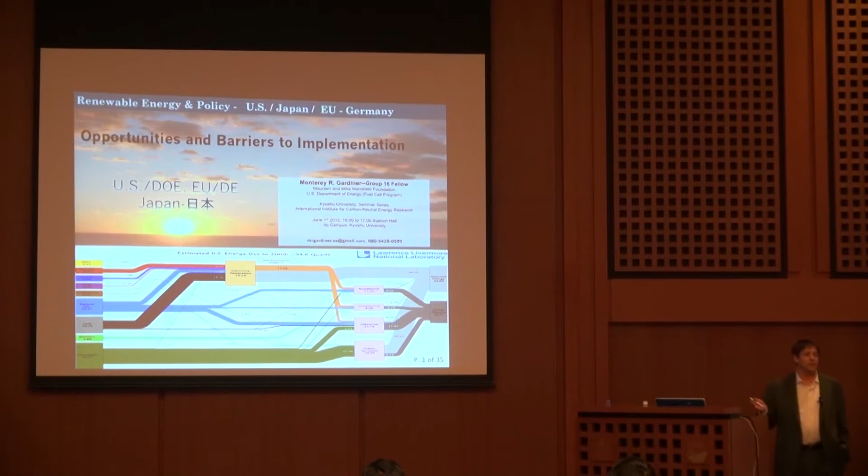During this talk, I want to talk a little bit about some of the opportunities and barriers to the implementation of renewable energy and energy policy in general. So can anybody here tell me one of the 3 E's of energy policy? Probably everybody here knows them, but who's adventurous enough to tell me one of them?

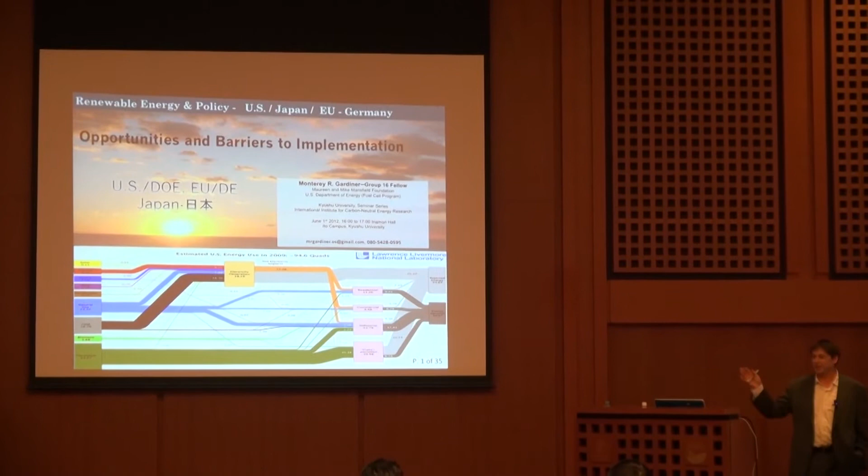I see somebody smiling with a green shirt, I think that means they want to answer. That's right, protection of the environment. That's one of the 3 E's that comes up quite a bit at NEDO and Keizai Sangyo Sho. Okay, how about somebody else?

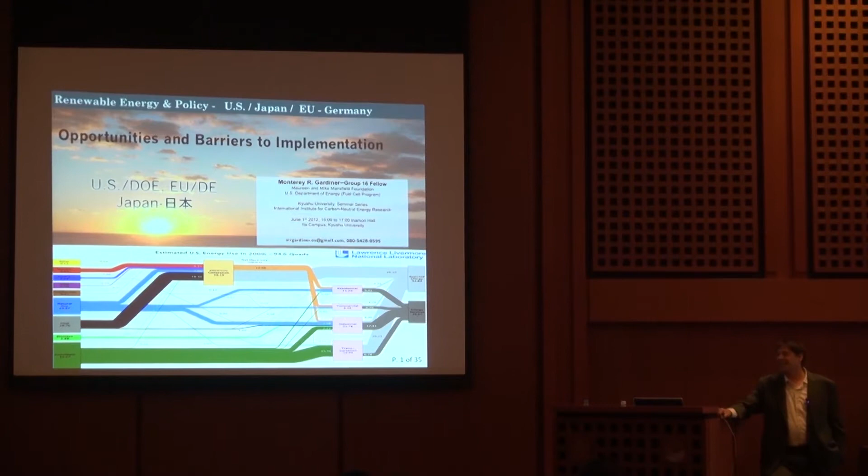Close, but we're trying to get the guy with the blue shirt to answer. All right, security of energy supply. That's one of them, and then we got one more. That's part of environment, but the last one I would think is the economy.

So how do you ensure that your economy stays strong? If you're paying too much for energy, your industry is at a competitive disadvantage compared to other countries. But I think an example of this might disprove, or prove, that the 3 E's are somewhat interrelated.

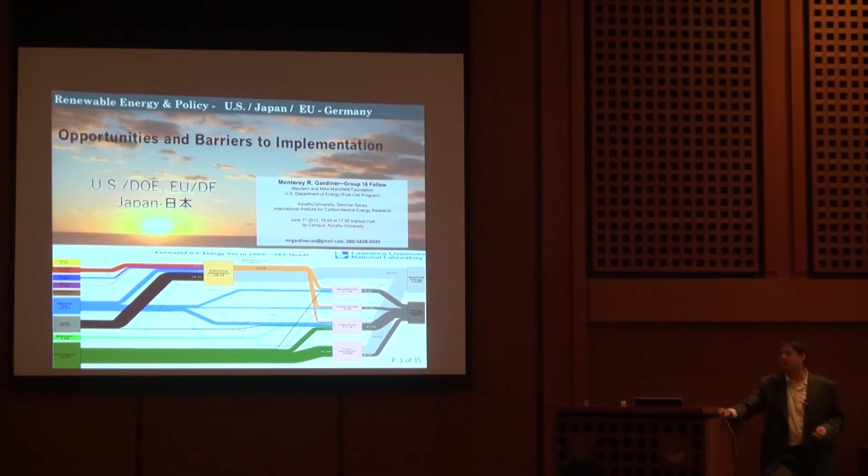Does anybody here know how much renewable energy Germany currently uses or consumes out of their entire energy or electricity supply? It's been in the newspaper, I think, probably fairly recently. Oh, there's somebody with a white shirt, they raised their hand. Minyo. Hi.

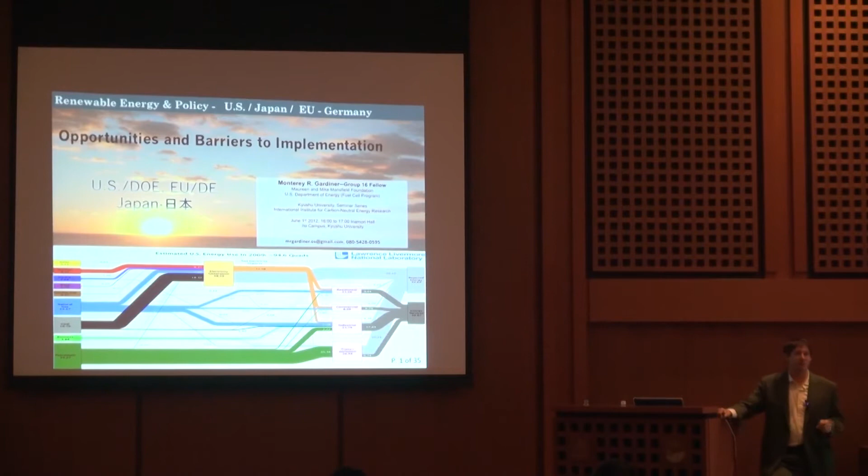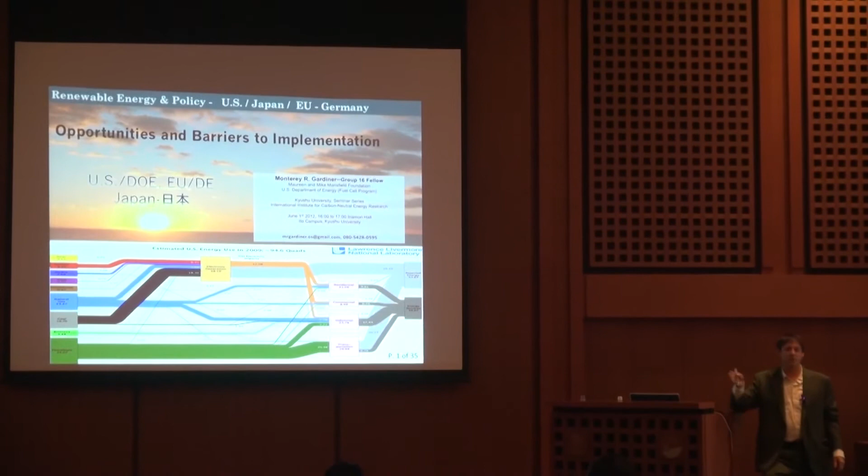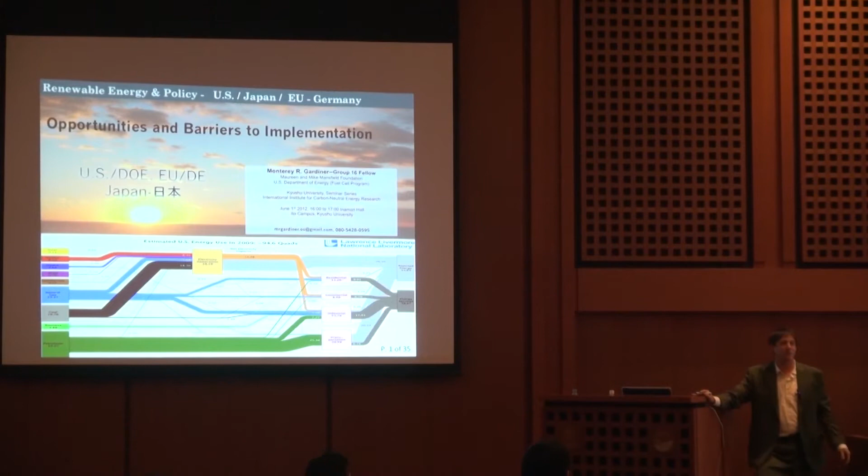Huh? A little bit louder, sorry. Anybody? You with the white shirt. Yeah, which country is strongest? Which country in the 27 countries in the EU has the strongest economy currently, probably?

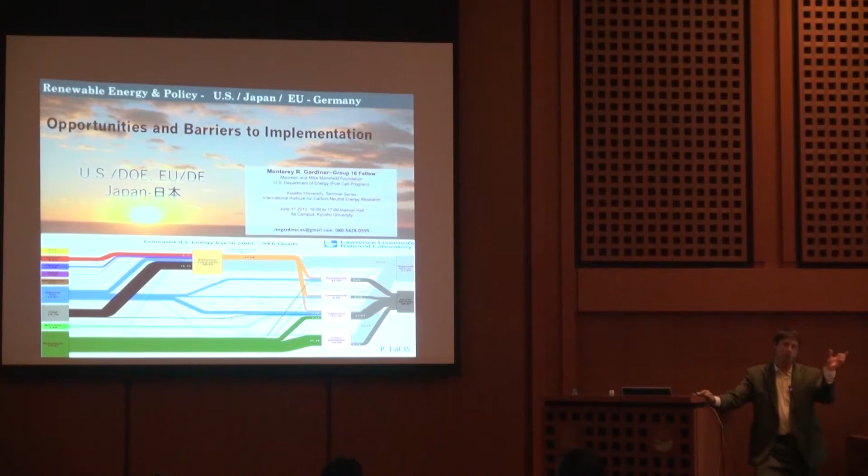Hi. Hi. Okay, so I think the point I wanted to make here is that the economy and renewable energy can go together. Just because you have a lot of renewable energy doesn't mean your industry has to give up a competitive advantage. So let's move on.

So thinking about energy and choosing policy, I'm going to start with environment and then work my way through environment and energy supply, security of supply.

So 450 parts per million, why does this matter? This is from the Mauna Loa Observatory in Hawaii. You can see that gradually the concentration of CO2 has been steadily increasing, right? So we're almost to 400 here. This data is from, what, May, somewhere on here it says May 7th. So this is fairly recent. So the CO2 now, you can go there.

But people will say, okay, so why do I care if we get to 450 ppm? Why is that a problem? Does anybody know what the degree temperature rise is that we're worried about?

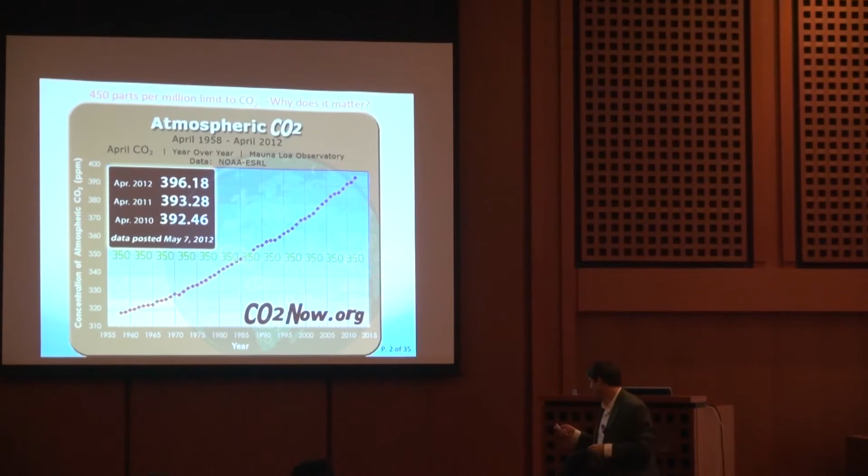So people are worried about a 2-degree temperature rise, in terms of global warming and environment. So let me see if I can go on.

So if we look at weather from last year, there's a lot of information here, so I just picked out a couple that I think might be relevant. For 2011, this was the 9th warmest year in 130-some-odd years. So if we jump down here, let's look at Thailand.

So July through December of last year, there was a lot of flooding. Everybody remembers that, there was probably information on the news. It covered almost a third of Thailand's provinces with flooding, and there was a $45 billion cost to that flooding. It was almost 15% of their GDP.

I'm curious as to what that impact was for Japan's auto industry and technology industry. I think Toyota, Honda, and many other companies had to receive parts and wiring harnesses from Thailand, and because of this flooding, the supply chain was stopped from just-in-time manufacturing. So this environmental cost is not just the environment, it's also the economy. It's very interlinked when you start thinking about the 3 E's - they're not just one single item.

In Texas last year, there were over 100 days that were over 100 degrees Fahrenheit. This causes a lot of damage in terms of agriculture, for ranching, for animals, and for the forestry industry as well. So that was $10 billion worth of damage to the Southwest alone.

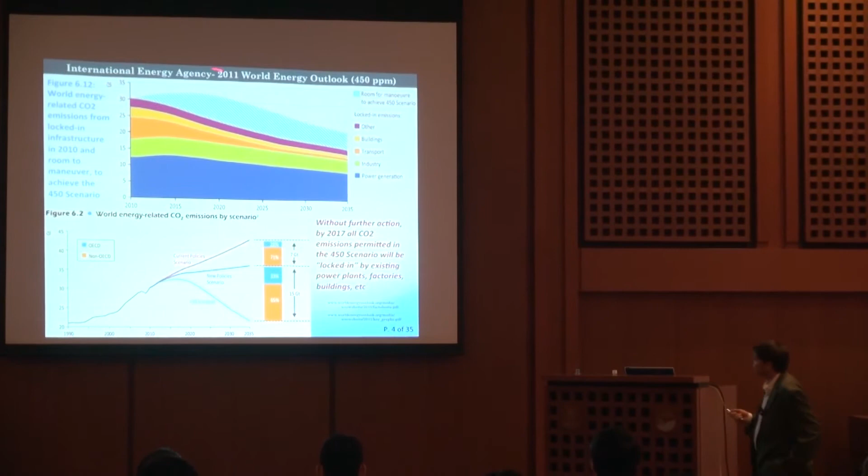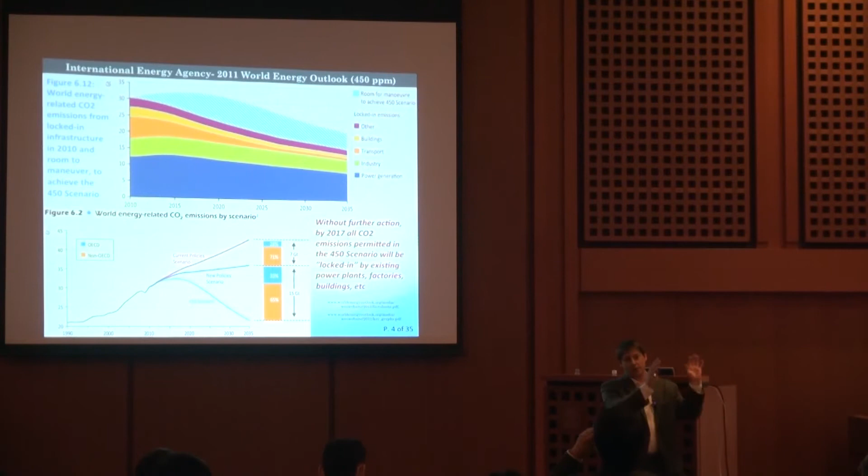So IEA has their 2011 World Energy Outlook. They release this outlook every year. This is the International Energy Agency. In the past, this was very focused on energy security, setting up strategic petroleum reserves for the member countries - I don't know, it's 30 some odd countries. And then also looking at nuclear power and ensuring that power is part of the energy mix for most of these countries, or at least supporting calculations for promoting nuclear power versus maybe renewable energy.

So you can see they have this 450 ppm scenario, which is around 30 gigatons of carbon. They talk about this wiggle room to try to get to that scenario. You can see power generation is the biggest portion of CO2 emissions - we have industry, transport, buildings, and so on. If you look at these projections, you can see there's a current policy scenario where carbon just keeps going up, and it won't be that far before we hit that 2-degree temperature rise. You can have maybe some new policies, but really the 450 ppm scenario is going to require a big reduction in emissions.

And one of the challenges here is that when you put in a nuclear power plant, how long does a nuclear power plant generally last? Is it like 30 years, 60 years?

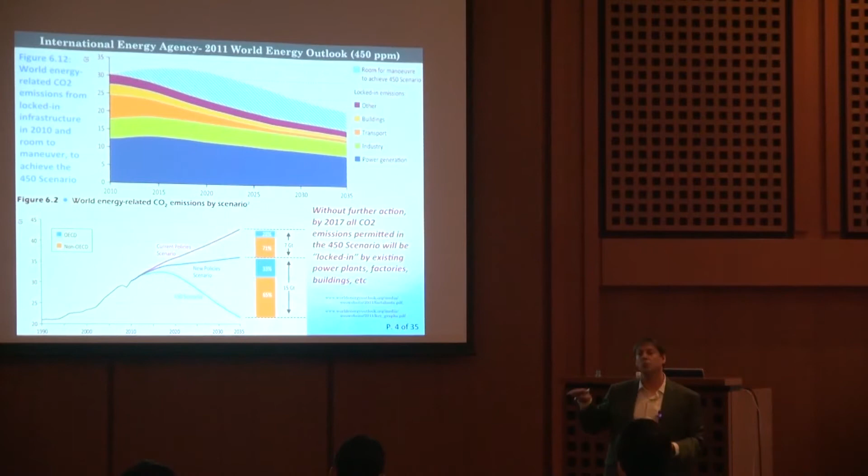It's a stranded investment. There's no chance to put in new technologies that have improved. If you look at the cost of solar modules, they've dropped by 50% in the last 3 years. Part of that is market problems because there's an oversupply of modules due to feed-in tariffs in Germany and Spain and so on. But new renewable energy technologies are improving every year. If you put in a coal power plant that lasts for 40 years, you're stuck with that coal power plant - you can't think about changing your energy infrastructure.

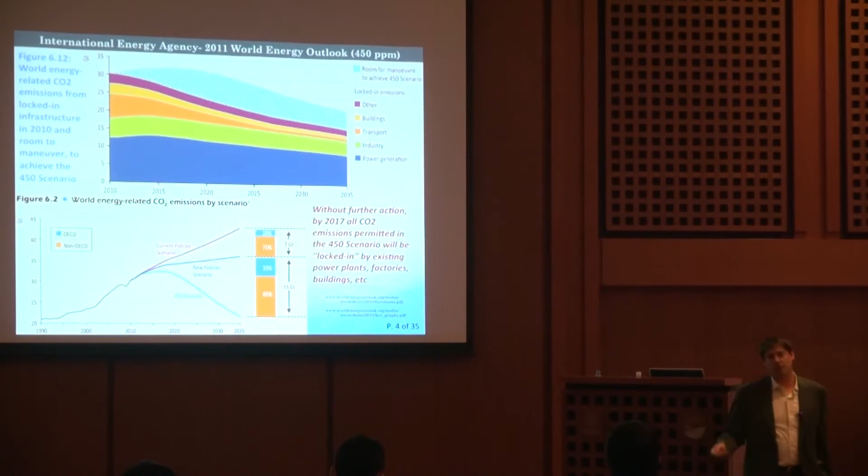So for people thinking about energy, this ExxonMobil Energy Outlook is a really nice brochure - you can download it from their website. It talks about the projections for China's coal use, which may level off in 2030 or so. Just about everywhere else in the world, the use of coal has started to decline. If you look at natural gas prices in the US, they're at historic lows - I don't think that's sustainable, I'll get to that. But natural gas is definitely cleaner, less costly, and has fewer environmental problems compared to coal.

And one of the most important things is it can load follow renewable energy much more easily. What I'm trying to say is that if you have a coal power plant, you have to run it a minimum of 5,000 hours per year, or it's just not economical - it's better to shut it down rather than transporting or storing that coal. It's almost like a nuclear power plant where you just don't want to turn it off, so you need to always have some kind of constant output.

So what do we do if we have a population that's growing rapidly? We have 7 billion people on the planet now, moving to 9 billion in the next 30 years, and all of that energy use is going to increase. So what do we do if we're worried about 450 ppm? We think about renewable energy. What can we do?

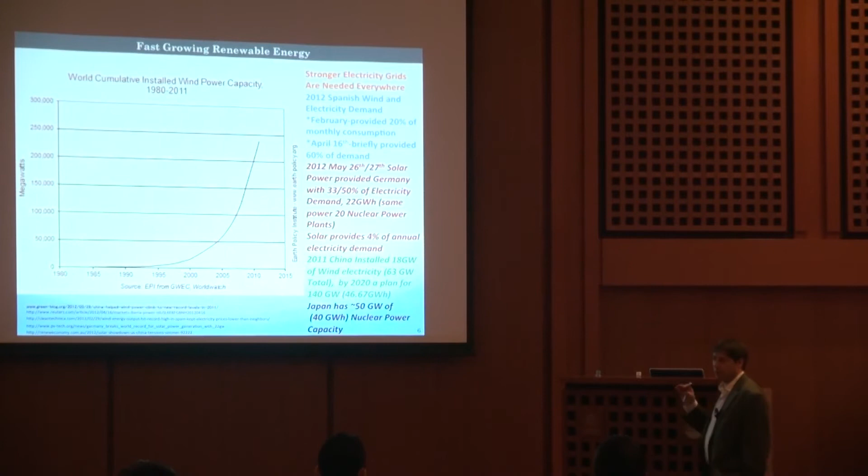You can see Spanish wind demand, they've been hitting really high percentages of renewable energy coming into their grid. I think they have 5 gigawatt hours of pumped hydro versus 27 gigawatt hours in Japan. So they have a relatively small amount of pumped hydro, but through the entire month of February, wind energy supplied 20% of all of their electricity consumption.

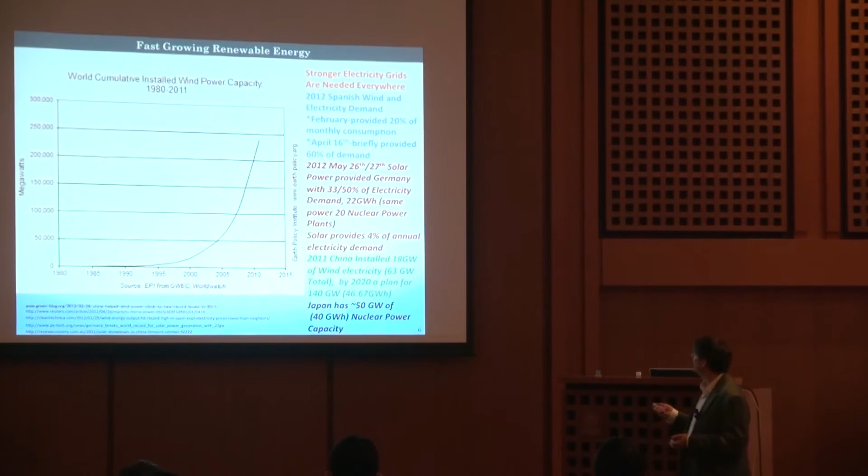Then in April, just a few weeks ago, there was a time period of a few hours where wind supplied 60% of the energy demand for Spain, for all of their electricity demand. It was 4 in the morning on a Monday or Sunday night, but it shows that the grid operators can manage large amounts of renewable energy coming into the grid.

It really comes down to policy and grid codes and more technical issues. There have been several US studies that say for the US grid, you can get upwards of 20% wind energy coming into the grid, and you don't have to pay for anything specifically for the wind. You have voltage regulation and many other needs that are just needed for supplying reliable electricity, whether it's from a coal power plant or a natural gas power plant. And if you have 20% wind, you don't need to do anything special. This is showing up to 60%, they almost didn't need to do anything, at least for a day.

But even in Germany, as you get to much larger percentages of renewable energy, you really need a strong grid. You need to be able to move electricity quickly from the northern part of the country, where there's a lot of wind, to the south, or if the wind's not blowing, there's a lot of sun in Munich and elsewhere, so moving that north.

Recently they hit a record, just last week, where on a Friday, on a work week, solar provided 33% of all of the electricity needed, and this was from something like noon to 2 p.m. So it wasn't just a short instant, it was in the middle of the day. So very large amounts of renewable energy can come onto the grid. This is something like 22 gigawatt hours worth of power, almost 20 nuclear power plants worth. So it's a lot of renewable energy coming on.

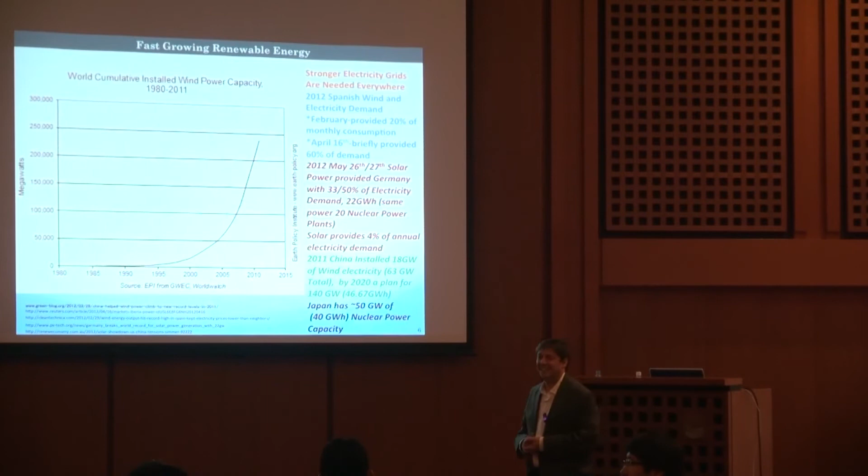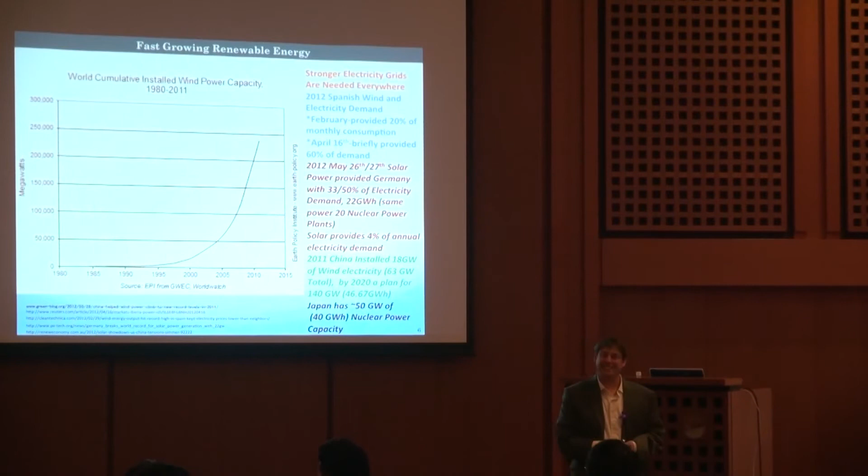So capacity factor is about using something. How long do you use it? If you have a power plant, you can't use it 100% of the time. It can't always be on, because at some point you have to turn it off for maintenance, or take care of some regulation inspection or whatever it happens to be. So you never get 100% capacity factor for anything. For nuclear power, oftentimes when they do a cost estimate, that might be upwards of 90 to 95% capacity factor.

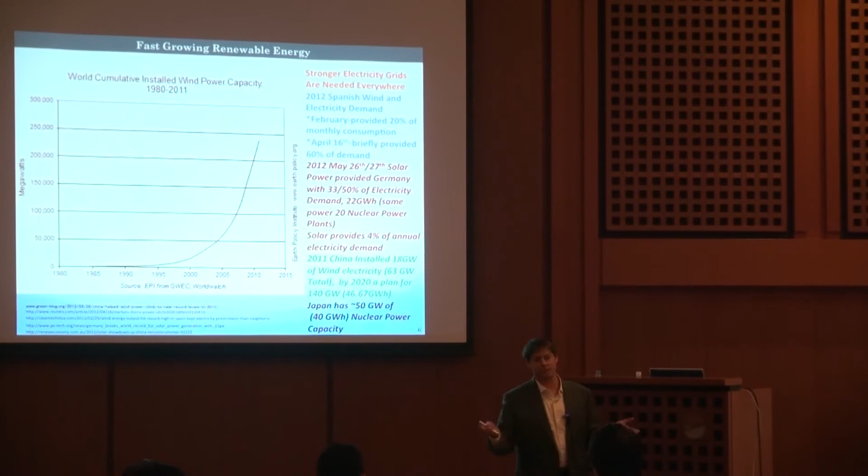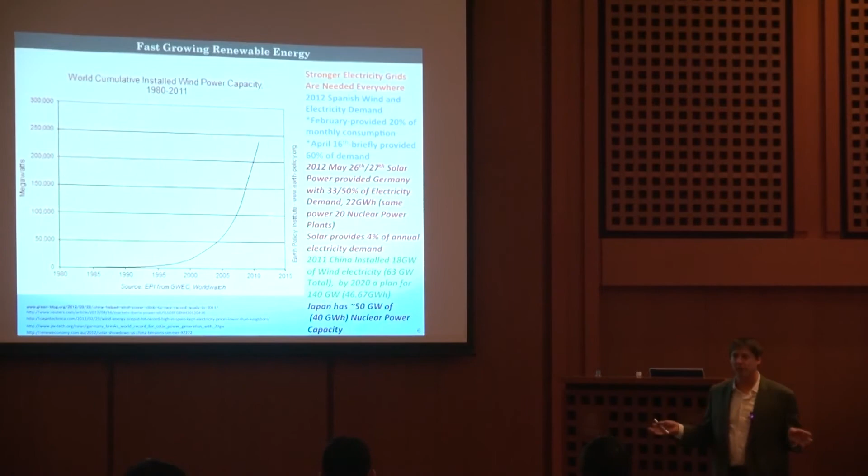So I'll get to something on the US here in a bit.

So regulation, policy approvals, or whatever.

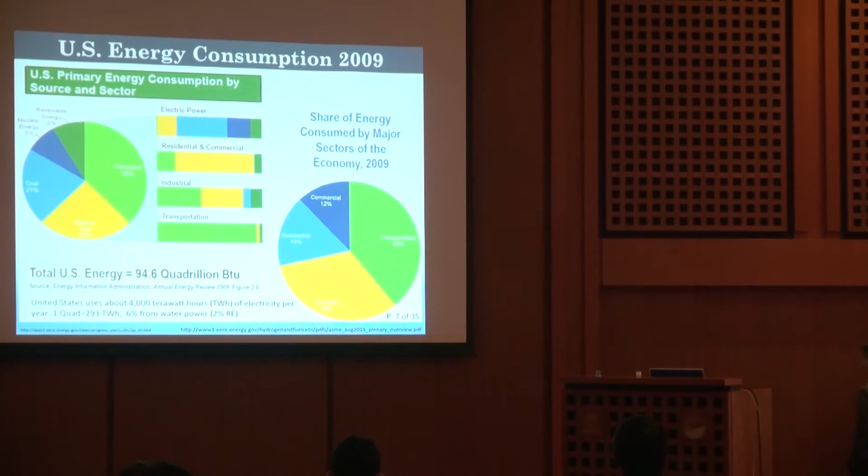Industry saw this. These people are working in warehouses where they're getting paid by the 30 seconds. If it takes you 10 minutes to swap out a battery pack instead of a fuel cell, you're not going to be able to make as much money. That's what drives anything. So on a life cycle basis, these fuel cell forklifts are lower cost.

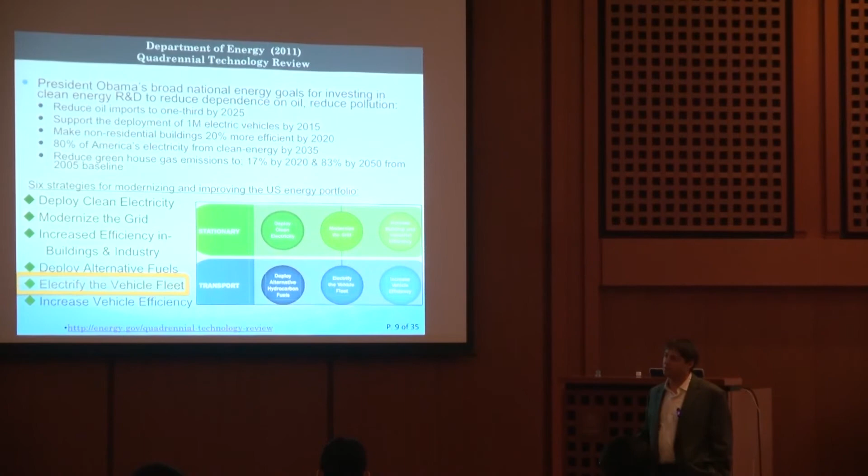So the quadrennial review was released in 2011. You can download a copy of it here. It talks about Obama's strategy for where he sees the US going and how we reach these high-level goals. This was the first time the Department of Energy had done this, as a way for all the different areas to work together.

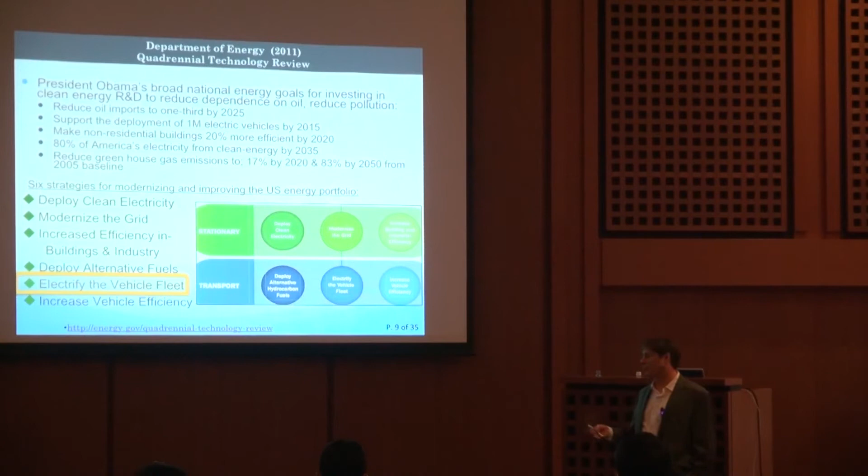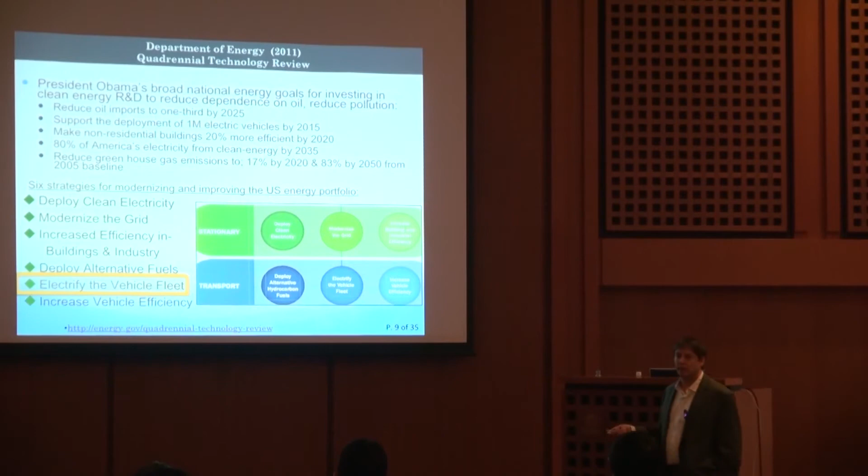Goals include reducing oil imports to one-third by 2025, and reaching 80% clean energy electricity by 2035—nuclear power, carbon capture, sequestration, and so on. The part I'm most interested in, given my background, and which I think has the biggest potential impact, is electrifying the vehicle fleet. If you electrify the vehicle fleet, vehicle efficiency goes way up and fuel use goes down—whether it's plug-in hybrids, electric vehicles, or diesel hybrids, everything's being looked at.

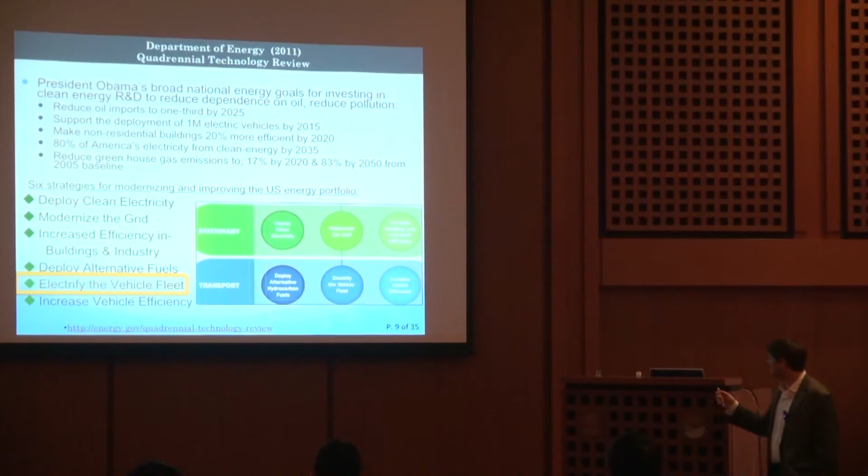So these are the stationary areas. Modernizing the grid is really critical for getting a lot of renewable energy into your grid. And then these are the transport options.

In the US, renewable energy policy is not driven at the federal level. We had a production tax credit for wind, maybe 2 cents or so, that's going to expire this year. But various states have really aggressive renewable energy goals—California has a law that 33% of electricity needs to come from renewables by 2020.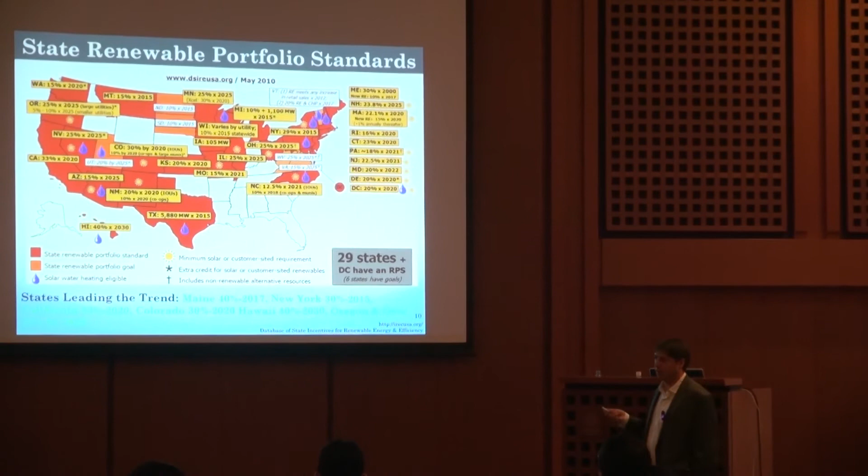In Germany, that's 35%. And you can see over here Hawaii—it's a miniature version of Japan, maybe, you let your imagination wander. They're trying to get to 40% by 2030. There's a lot of wind, a lot of sun.

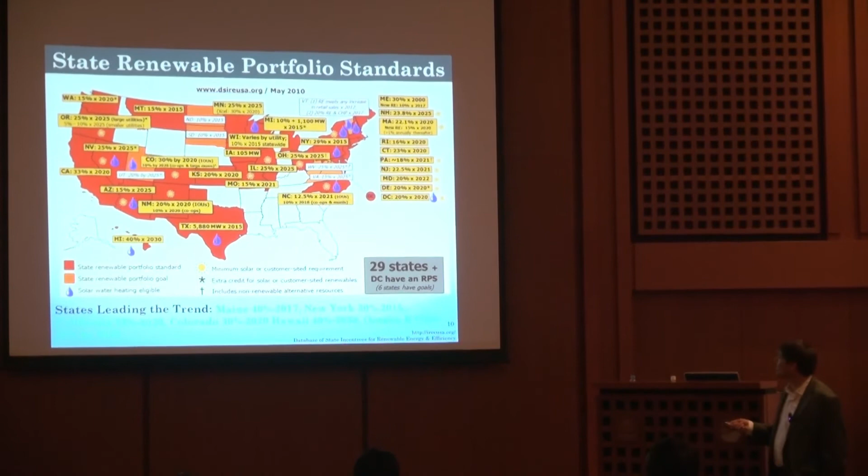Diesel electricity costs something like 40 cents a kilowatt hour, and that's competitive with wind electricity. At 40 cents a kilowatt hour, you're really close on PV, if not there already. That's just because it's hard to store and transport diesel—well, it's easy relative to maybe hydrogen, but getting it there over a long distance is costly.

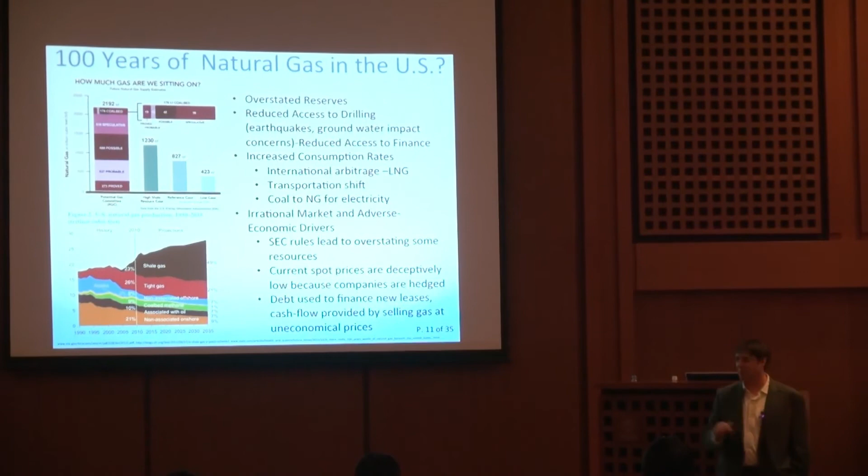So, 100 years of natural gas. Switching from renewables - if we're going to get to these high penetrations, 30, 40% renewable, how are we going to do it? I think natural gas is really key, not just because it's clean or cheap, though those help, but because it's one of the few fossil fuels that can load follow renewable energy. So if your solar is going behind a cloud or your wind's not blowing, you have natural gas. You won't get as high a utilization, so the people operating these companies won't have as much money, but it allows you a clean transition. So that's a good part.

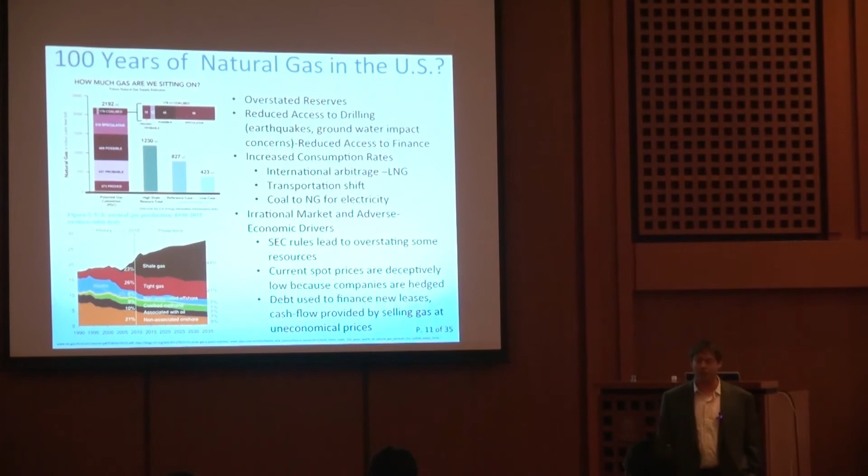So has anybody here read this '100 Years of Natural Gas'? It was making a lot of headlines. The International Energy Agency called it the golden age of gas. Has anybody heard about this? There, yeah, you with the tie. No? Okay, so the golden age of natural gas.

So maybe 5-10 years ago, the cost of natural gas was, I want to say, $7 a million BTU. Right now it's the lowest it's been in decades, something like $2 a million BTU. So it's dirt cheap relative to where it's been. But I would argue that that's a market anomaly. It's not real and it's not sustainable.

A lot of these reserves are overstated. From this report, which was covered in a lot of different areas, they were looking at - can I read this - over 2,000 trillion cubic feet. And that includes speculative, possible, coal bed methane, etc. But when you have a speculative resource, that means maybe it's there, maybe it's not. I mean, we think technology might get there, but it's very shaky ground to say you're going to count all of this as available.

A second problem, probably the biggest problem in that estimate, is that the demand figure was for only one year, 2009-2010, when this report was published. And when you only have one year's demand, of course it'll last a long time.

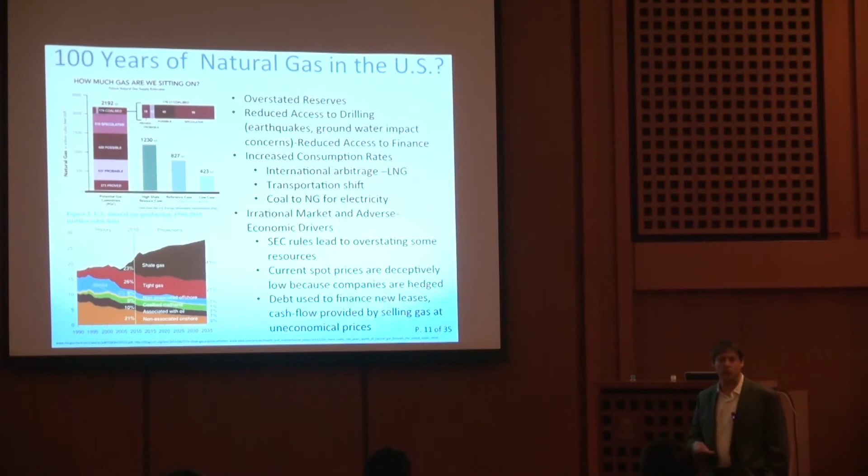But of course, what's happening, right? Japan has come to the US several times now requesting to import this low-cost natural gas. So they're looking at ways to get this onto an international market - you want to make it a fungible commodity, something that can move anywhere. Just because we blockade Iran, does that mean the price of oil is going to go down or that people won't demand it elsewhere? Once somebody burns oil, it doesn't matter where it came from. Natural gas, because it's a gas, is hard to transport, so it's hard to move. But once it starts moving like gasoline and oil, as LNG, it's going to be the same no matter where you are - whoever's willing to pay the most is the country that will receive that commodity.

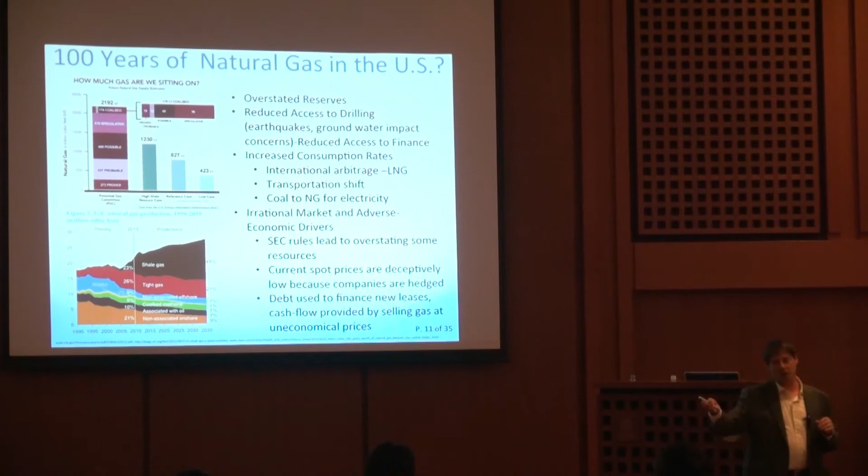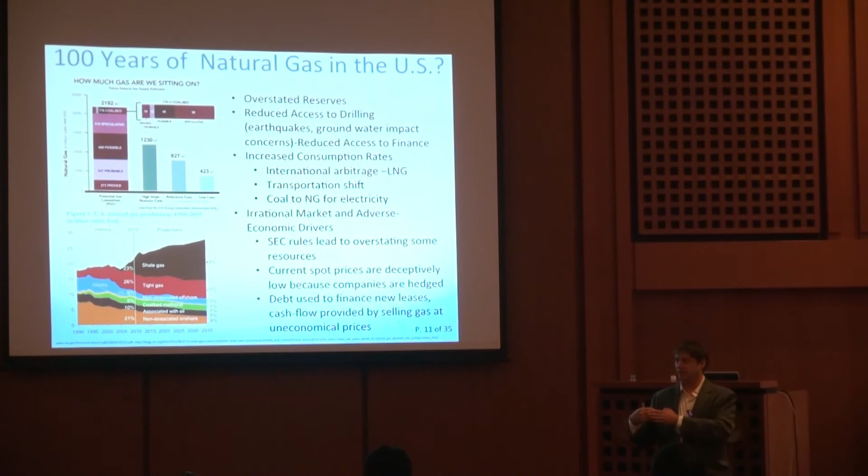So demand is going to increase. Some of the other challenges are that a lot of these companies drilling for natural gas are very small companies, called wildcatters. They go out place to place, and they have to take big loans to get the equipment and purchase the land. Once they get that loan, they have to pay it off. And in order to pay it off, they're trying to sell the gas, so that helps, but they have to go dig the next well to keep selling it.

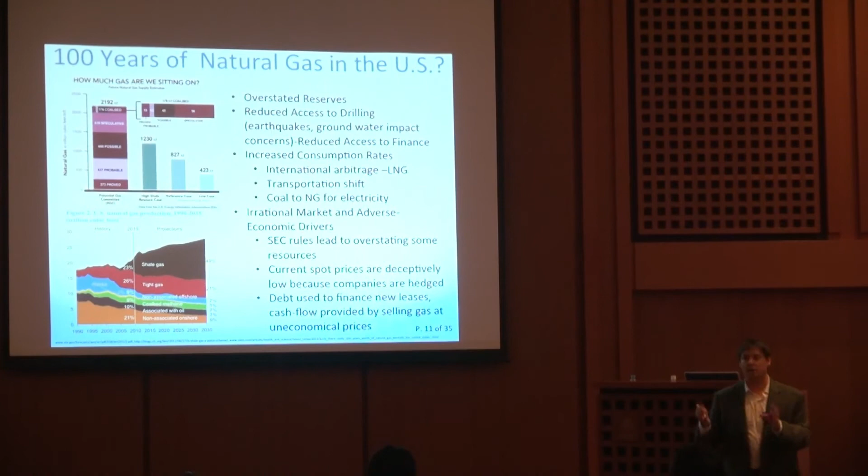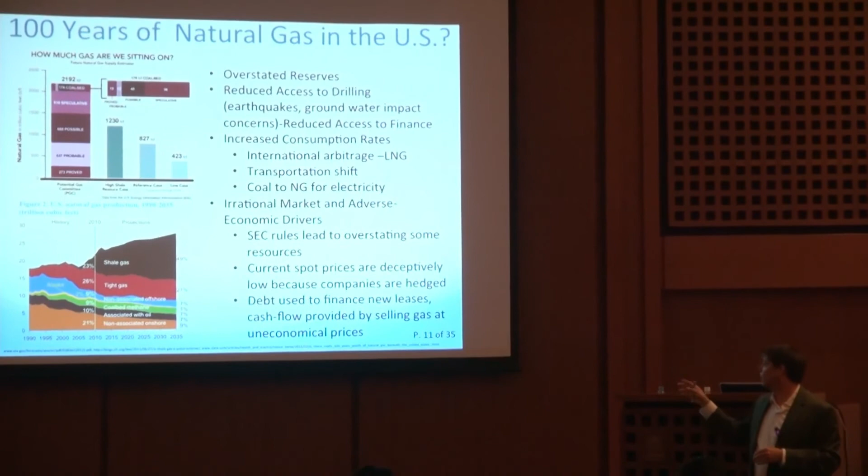Another problem is that a lot of these places have, I don't know if it's hedged, but they have a contract for, say, $6 a million BTU that lasts for 10 years. So they can keep selling and keep drilling because they're selling at $6 a million BTU since somebody's locked into a contract. But when they start selling at $2 a million BTU, that particular well hole would no longer be profitable.

So there's a lot of discrepancies in how natural gas is calculated and where this market is going. And one last thing is, if you start looking at a transportation shift to natural gas as a fuel, it'll take over 30 years to shift your transportation. By the time you've moved all of your vehicles to run on natural gas instead of oil or whatever else, by then you're going to have a lot less natural gas, and now you have to start all over again to start thinking about electric drive.

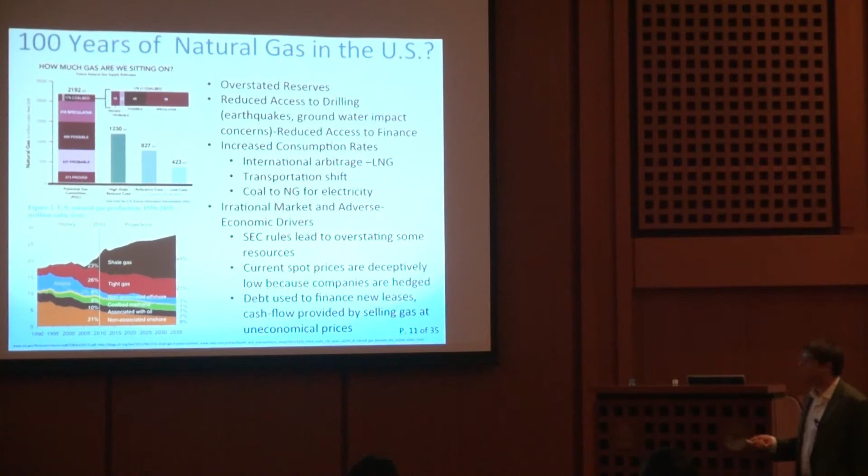So natural gas, looking into wind. So renewable energy has been just steadily increasing, and it's not quite as exponential as shown in the World Outlook, but you can see over 100 terawatt hours. So this is not capacity factor, this is actual electricity produced. 100 terawatt hours over, what is this, 5 years. So that's 7 nuclear power plants built out over 5 years. I don't know of any country that can do that.

If you look at the regulations, the time to get the community buy-off, all of the safety, it just can't be done. Vietnam's looking at putting in a couple of nuclear power reactors from Russia, another couple from Japan. But I think it's going to take them longer than 4 or 5 years. I think 2015, actually that's closer than that, to get those installed.

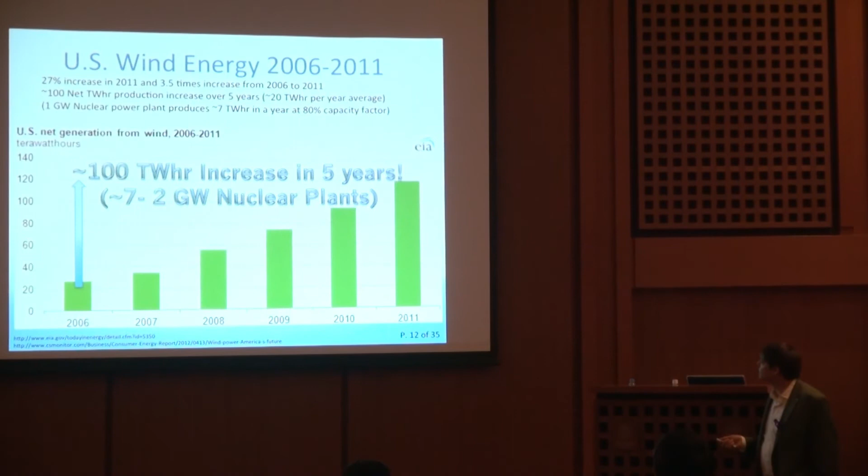So renewable energy trends. So over 5 years, the cost of solar power, the tariff that helps them become profitable, has dropped by 50%. So it was something like 50 yen per kilowatt hour. Now it's 25 yen per kilowatt hour.

Does anybody know what a feed-in tariff is? A few people? Just raise your hand. I won't call on you, I promise. Okay, I see one person. Anybody else feed-in tariff?

Japan's passed a law last August. It's going to start this July 1st. So a feed-in tariff, this is a way to encourage renewable energy. And what it does is it ensures that somebody who installs renewable energy that's more costly than regular electricity can still receive a 5%, 10% return on that investment. And the way they receive that additional money is everybody who uses electricity pays just 1 or 2 cents that goes into a central fund and then is paid out to these people that were willing to take the risk, though it shouldn't be a risk if it's 5 or 10% return on investment.

So in Japan, this law is going to start July 1st. And right now, the value for the solar energy is something upwards of 50 yen per kilowatt hour. It's higher than anywhere else in the world. And part of the reason is that there's no guaranteed connection. And of course, it's been a real challenge that we have this lost decade in Japan where renewable energy went from 0.5% to 1% as part of the electricity mix.

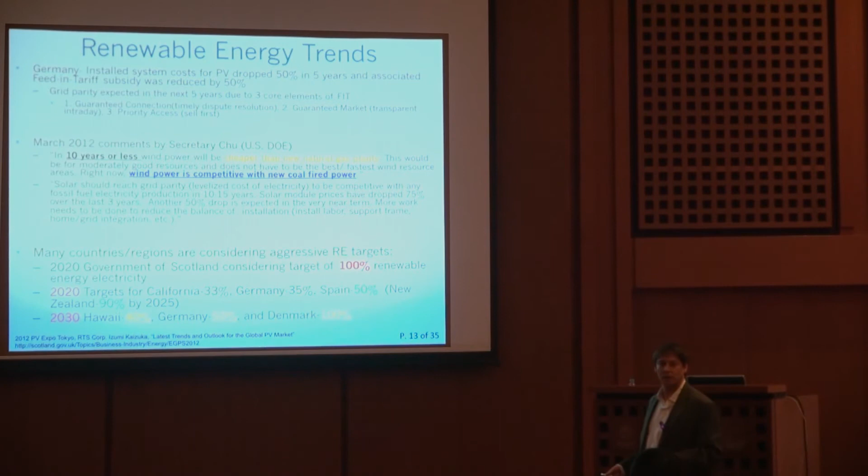So those with large pockets, Son-san Masayoshi, everybody knows who he is, SoftBank, right? He's doing a lot of big solar projects, getting them ready in southern and northern Japan.

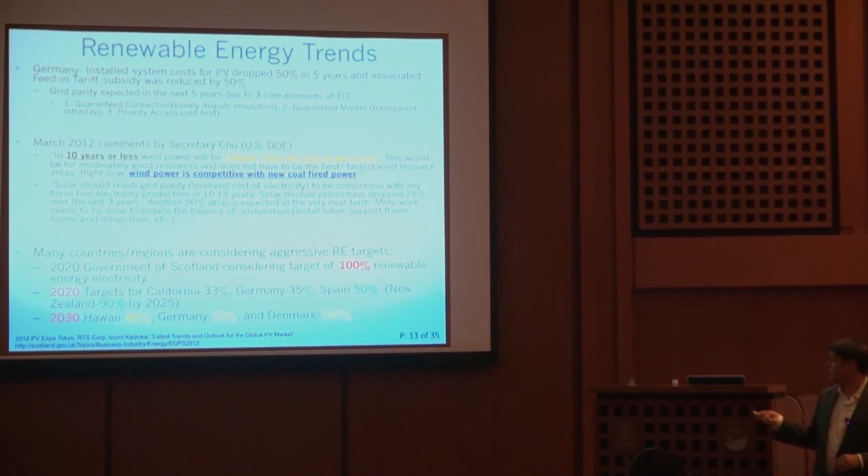So right now, yeah, wind is competitive. Good wind right now is competitive with coal. In 10 years, it'll probably be competitive with natural gas. And if you look at solar, that'll be another 10 to 15 years. So again, thinking about how you're locked into energy infrastructure.

So targets, how do you get this big renewable energy? It's hard to take that risk. If you don't have a feed-in tariff, you can have aggressive renewable energy targets. And you kind of need both to balance each other out.

The government of Scotland's looking at 100%. So part of the UK, they got a lot of offshore wind resources and so on. So they're now contemplating doing 100% of their demand by electricity, renewables, but they're going to keep their nuclear power plants, they're going to keep their coal, natural gas, and they're going to export that additional energy to other parts of Europe.

California, we talked about. Denmark is looking at 100% by 2030. I think right now they're at 40, 20% maybe. Germany's looking at 50% by 2030 and 80% by 2050.

So energy in Japan, we have 50 gigawatts of nuclear power that's just been turned off. Right now, Hashimoto, the mayor, governor from Osaka, he was against the nuclear power plants till somebody twisted his arm, and I think there was a headline just in today's newspaper about him switching, and now all this public backlash. Why did he change his mind? I think he's very political.

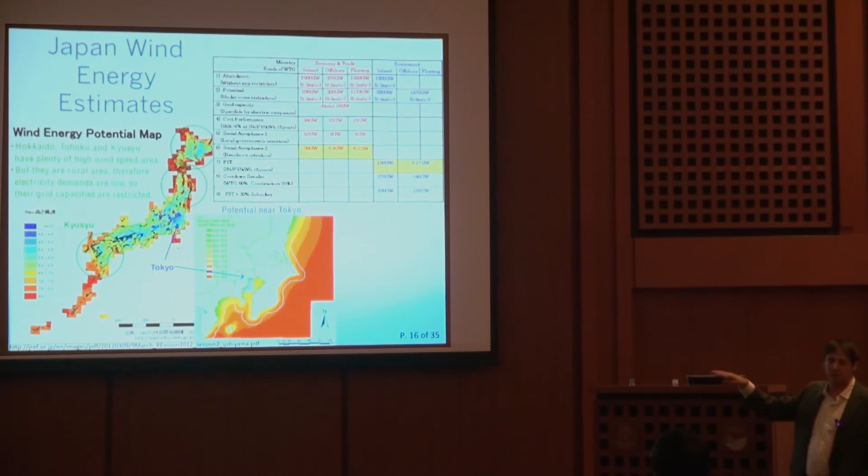Because you can use that, you get 100% utilization since any wind energy produced doesn't have to be curtailed or turned off. It can be fed into that liquefier or electrolyzer.

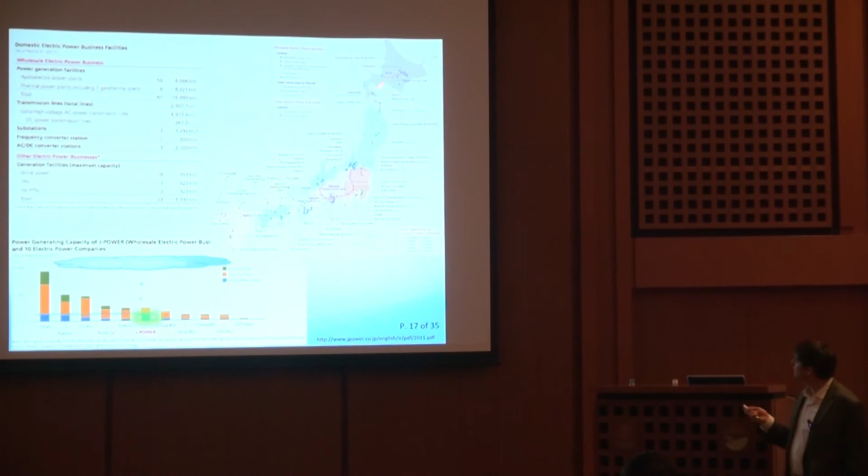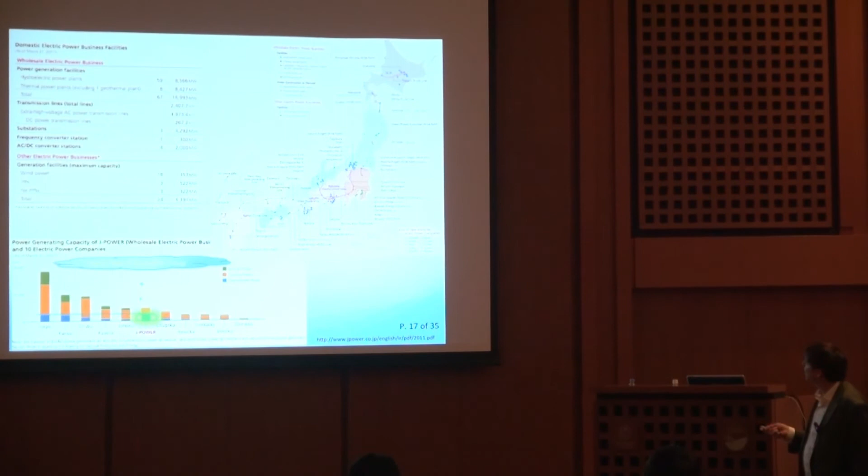This is a slide showing J-Power's transmission lines. I'll be spending a couple months there for the last two months of my fellowship in their planning department. You can see they have some transmission lines here in Hokkaido. Their renewable energy or water power is the highest of any of the 10 traditional electric power companies, close to what TEPCO has.

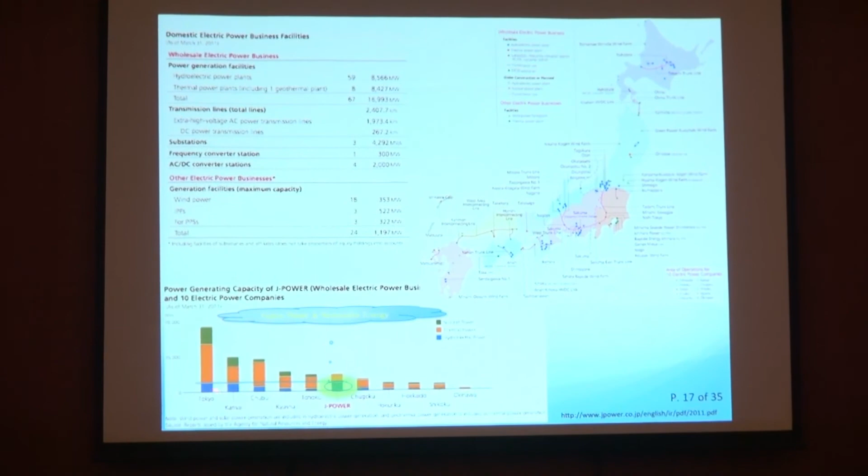There are several energy committees now happening in Japan, like this General Advisory Committee, Sougou Shigen Enerugii Chousakai. In the basement of METI, every month, twice a month, they have a meeting from 6 to 10 p.m. They have 25 people from universities, Japanese industry, and various consumer groups come talk about what the best energy mix is. Does anybody know who Iida Tetsunari is? He's a renewable energy samurai, a big advocate for renewable energy.

There's one side that says we need to do renewable energy, and another side says let's see what we can do to bring the nuclear power plants online. There hasn't been much compromise. I think this committee was tasked with coming up with a final report where they all agreed on the best mix for the next 30 to 50 years, where Japan is going to go for its energy priorities. But I think it will come out with two versions, and it will be very hard to unify given the personalities on this panel.

The NPU, National Policy Unit, had a cost comparison looking at the cost of various fuels. I have a chart a little bit later. It's interesting, they talk about wind electricity, and after 20 years of development, they said the cost came down 1 yen per kilowatt hour. So it seemed fairly pessimistic, but I couldn't read the whole report.

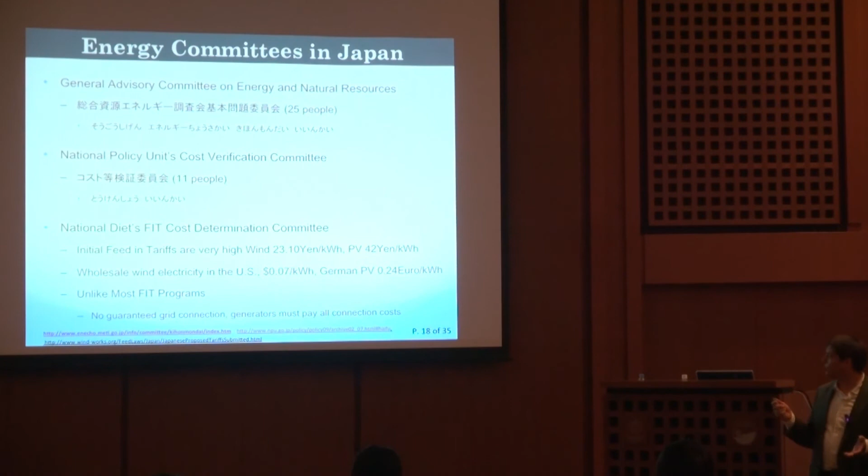Another big challenge is there's no guaranteed grid connection, which is generally one of the cornerstone elements of a feed-in tariff. Generators must pay all connection costs, whereas in Germany it's up to the utility to pay for the connection. So it'll be very interesting to see what happens with renewable energy come July.

So this is the cost comparison. The gray bar here is from 2004, then 2010, and then 2030. You can see how nuclear power cost is not quite doubled, but there's still some uncertainty—what's it going to cost to clean up and compensate people who had to move.

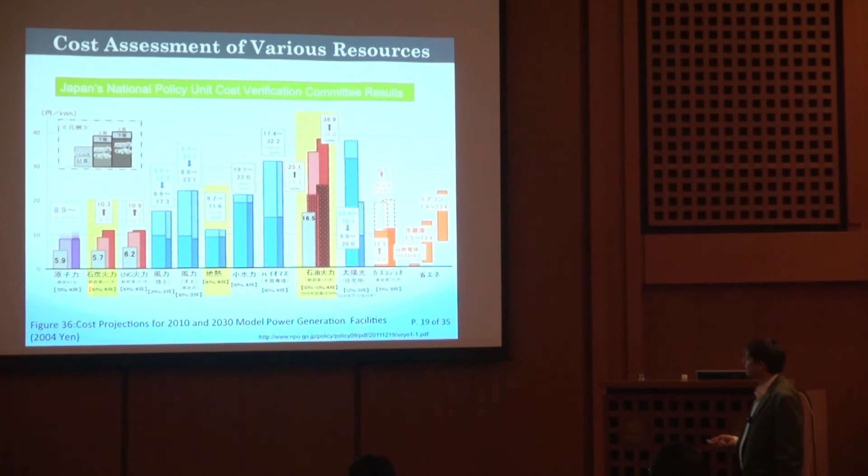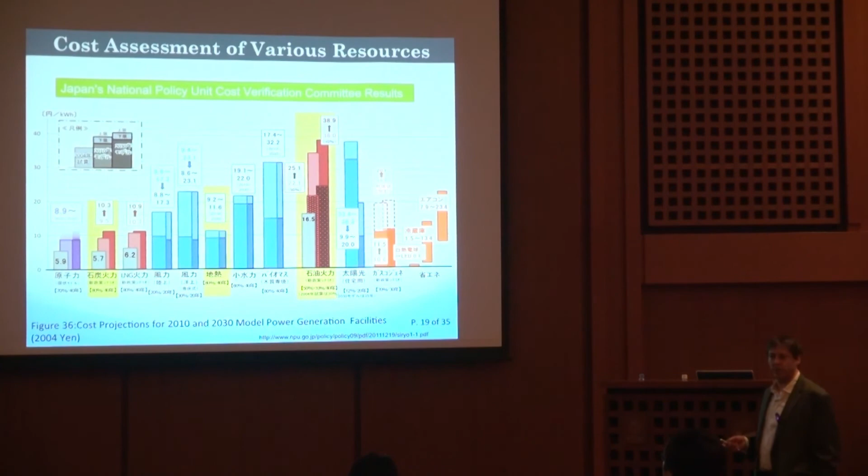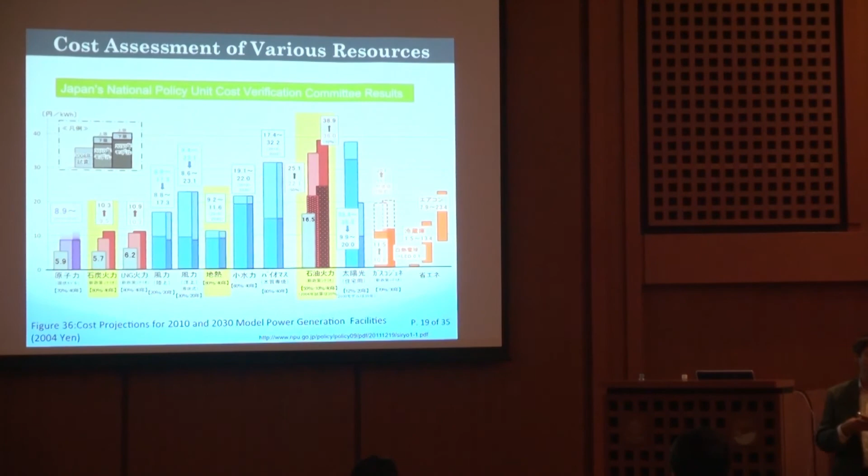This is Sekitan Karyoku, the coal-powered electricity. You can see LNG costs as well, and here are the wind costs, onshore and offshore. But these costs are coming down rapidly—there's a lot of R&D happening in Europe. The UK is planning a 300-some megawatt offshore wind farm, and there was a recent announcement of joint cooperation between DOE and the UK Department of Energy.

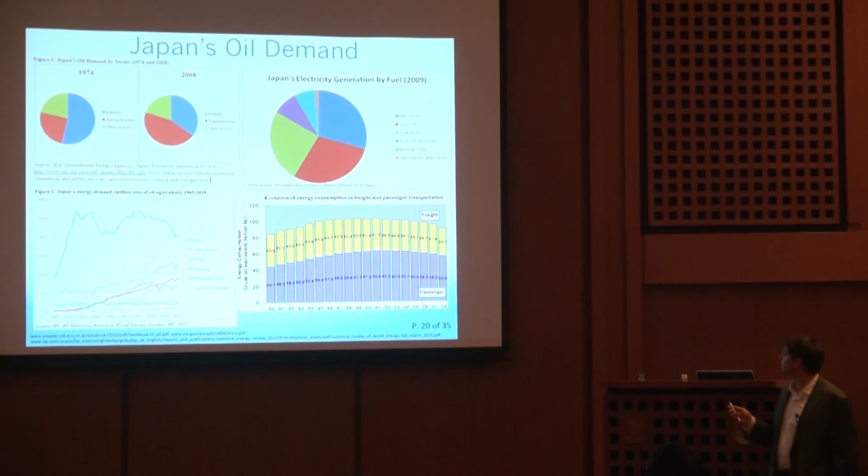I think in the 1970s, early 80s, California outlawed the use of oil for producing electricity—it's too dirty, too expensive. But it's still happening in Japan, and probably even more so with nuclear power not being available.

So, alternative transportation. Right now there's a lot of interest in electric vehicles—we have the Leaf, the i-MiEV, which I think has a different name here from Mitsubishi.

In Germany, they have a big incentive to move to hydrogen, and that's where you see a lot of the efforts to develop hydrogen refueling stations. Gasoline there is almost 180 yen per liter, so even if hydrogen is $10-12 per kilogram, you're still better off using hydrogen.

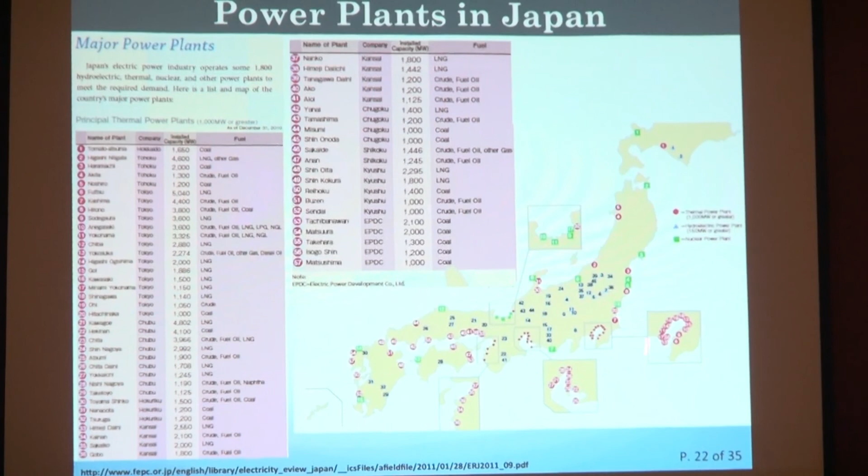If you look at the green squares, that's where the nuclear power plants are, so again you have a lot of transmission capacity already. More importantly, these blue triangles are pumped hydro. So if you have renewable energy at these green boxes, you can move that power, just like nuclear power is moved at night, up into that pumped hydro and then use it during the day. That way you don't worry about the variability in renewables—it's just like a nuclear power plant you can't turn off versus a variable renewable.

They both have their own challenges that are fixed with storage. So if nuclear power is 30% of your output on average, maybe at night when nobody's using it, only 10% of a nation's electricity can still be used. So at night, 20% of the electricity had to go somewhere from those nuclear power plants, and it went into pumped hydro.

So this is a recent paper from 2010 that shows the number of megawatts of pumped hydro. You can see Japan, lots of mountains, lots of rain, so they have a lot of resources. It's hard to build out more, but if this pumped hydro is primarily being used for nuclear power, maybe some of that's freed up if you can switch off some of the fossil fuels. That's how they've been able to make that shift from shutting down all the nuclear power plants, running all the fossil plants at night.

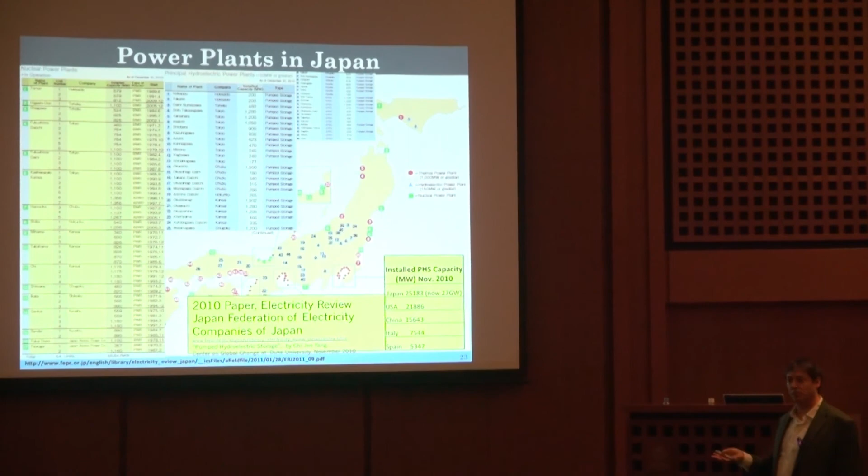So strong grid, you can see Japan's grid has this comb structure. In Europe, it's a mesh structure. When you have renewable energy that's going up and down, you need to be able to move that quickly between regions. And then you also have the additional challenge of the losses and the cost of the 60 hertz and 50 hertz.

So there's advantages to having these small regional control areas. It's higher efficiency for the generation plants because they can plan just for that small region. There's low electric losses because your transmission is much shorter, since you're using your power at the same place. Easy to control and manage, but there's a lot of difficulties, and the final one is it's hard to bring in renewable energy because you don't have a strong grid.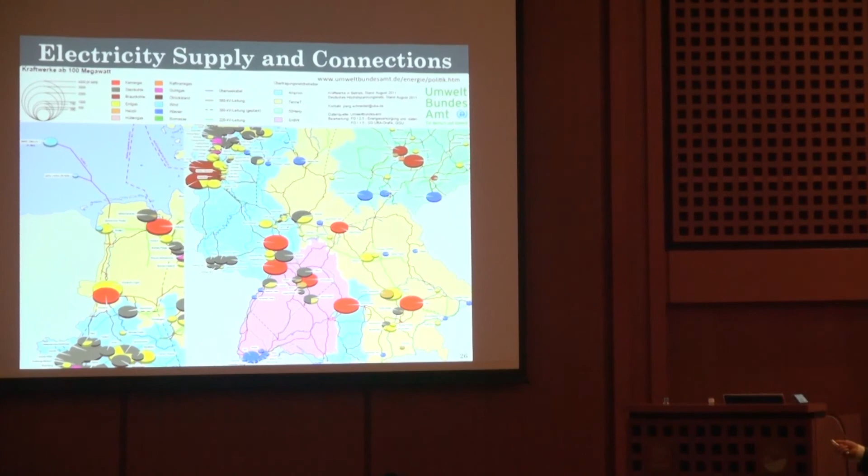In Germany, you can see where those resources are, and where the transmission lines are in between. It makes it very easy for somebody who's thinking about the future of energy to ask: where's your resources? How are you going to move it? So I like this example to talk about that.

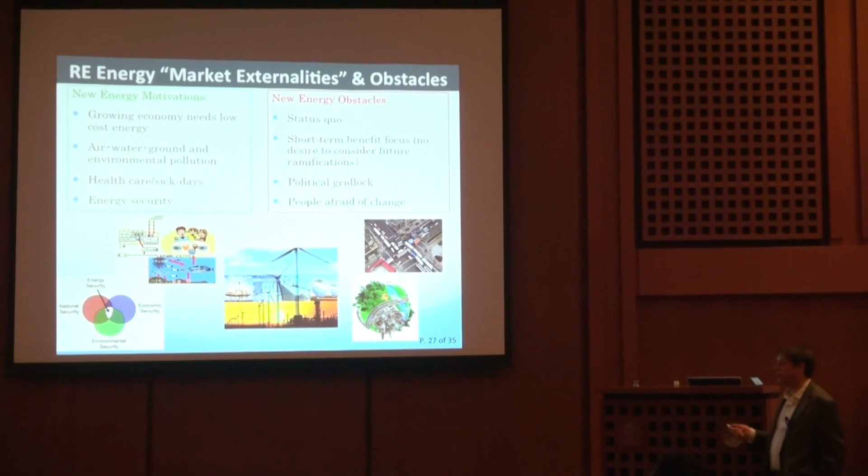Market externalities, I'm not going to go into that. Everybody knows about why it's been so hard to change. Barriers. We have economic barriers.

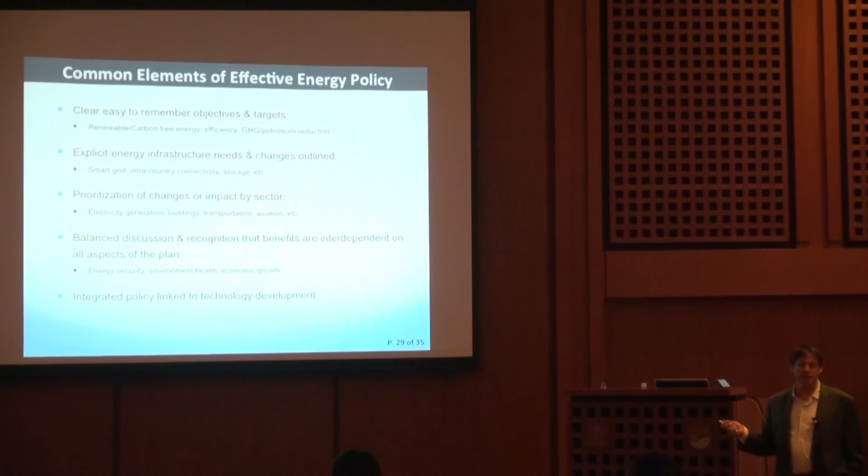They're all very linked. So common elements, you want it to be easy to understand your policy so people know what they're working towards: 20% renewable energy by 2020, 20% less greenhouse gases, 20% more efficient. That's an easy story. It's easy for people to understand.

If you look at the policy implementation time, we talked about this. It takes a long time to get stuff passed through the Diet. And fossil fuel, nuclear power, these plants last a long time.

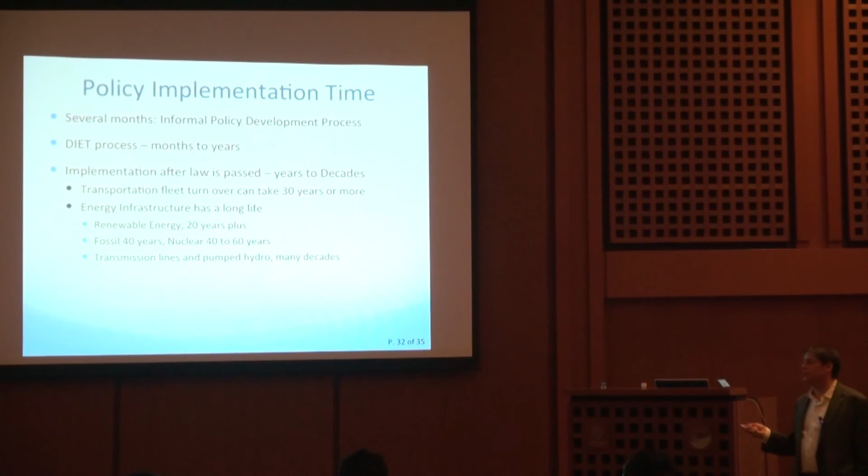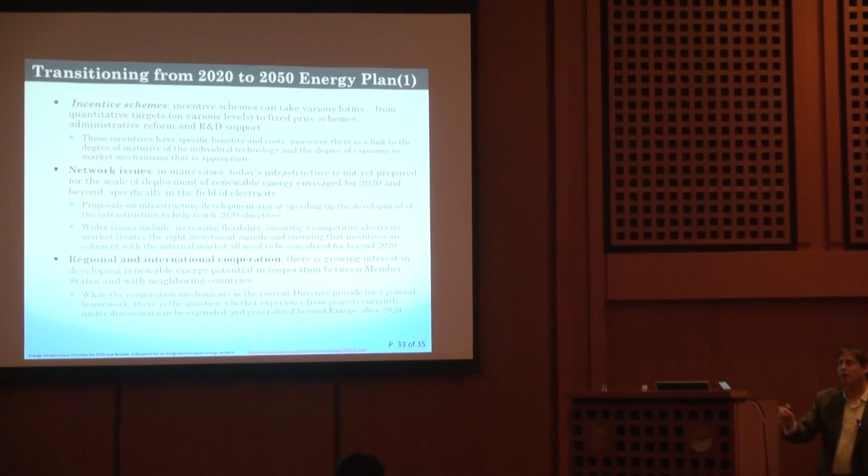Europe's already planning for their transition from 2020 to their 2050 energy plan. They've all worked out where the challenges are going to be. They have it written for 2050, they have it written for 2020. Where do they want to go? Now they're thinking about what are the challenges to transition between those plans. How do we make it happen faster? How do we make it happen more efficiently?

Biofuels are coming under a lot of scrutiny because of their sustainability, opportunity costs, land use, and so on.

So the last question is, can you build your economy? Can you make jobs from renewable energy? Renewable energy is a lot less dense. You can have a nuclear power plant that goes into a small area the size of a school, and you can have 9 cents a kilowatt hour. That's what you're paying. You can have wind energy, and even if the wind is 10 to 15 cents a kilowatt hour, you're getting the same amount of electricity, but now instead of all of that money going to one concrete company, that money is spread out to all of these different areas where people are installing these wind towers. It's very spread out through a region rather than just one small locality that receives all of that government aid and support, or the funding, the economic development.

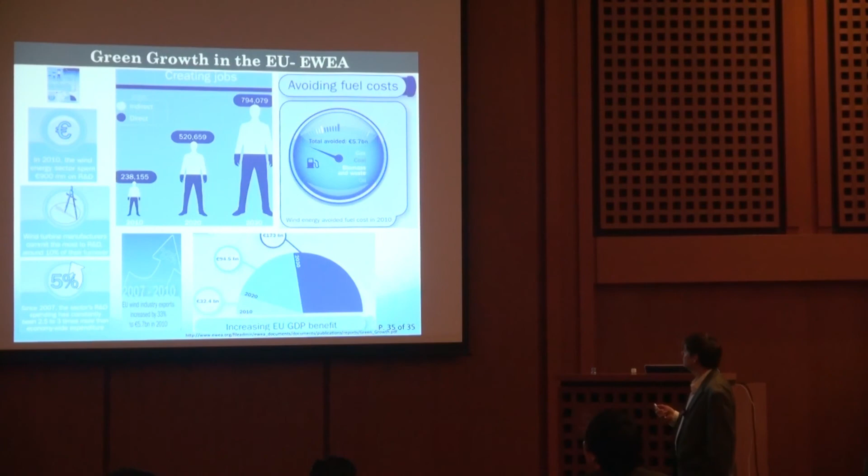So 200,000 jobs in 2010. They're estimating this to go up to 500,000 jobs, with this 20% renewable energy target, for Europe—this is from the European Wind Energy Association, their chart is here. But there's a lot of investment going into R&D, more than any other industry, for wind. So I think wind costs are going to really come down in Europe, and then they'll be able to export that, which will further drive the GDP benefit.